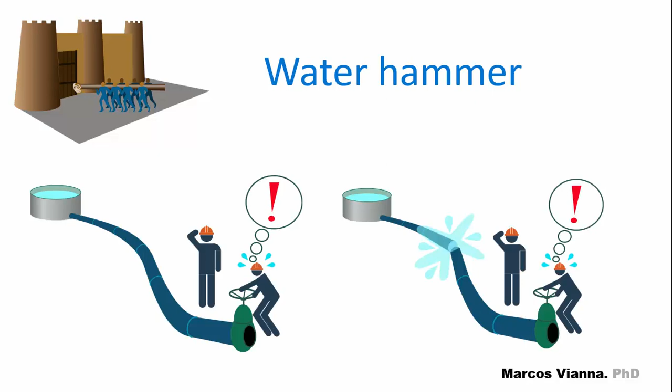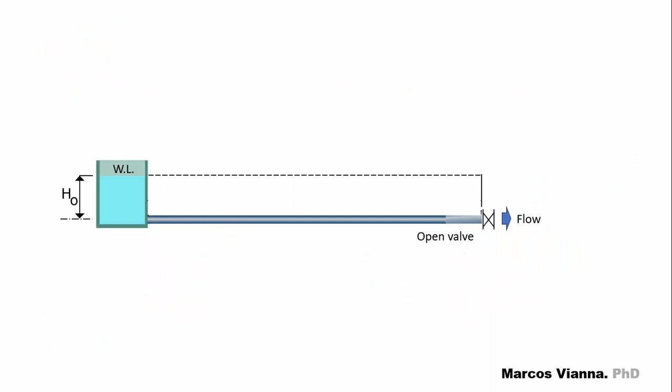In our previous video, we began studying the water hammer, a phenomenon which occurs in closed pipes during transient conditions. As we saw, it can happen during the closure of a valve, when the closure time is too small, and in pumped lines, when a power failure occurs. We saw that when water flows in an installation like this, if the valve is closed instantaneously, transient pressure or transient heads will occur.

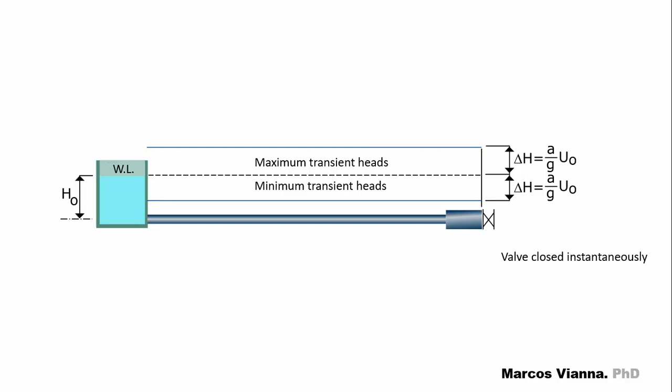Let's study this phenomenon step by step.

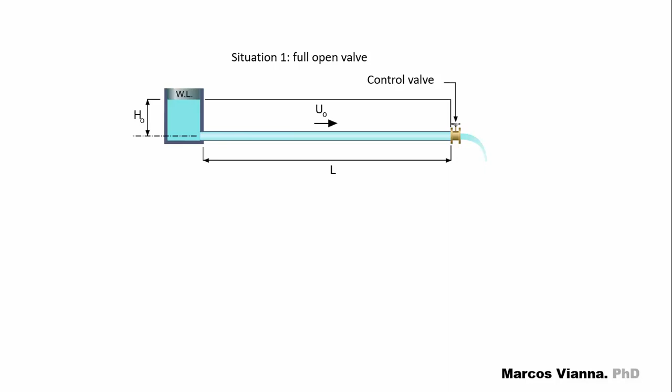Okay, this is the initial condition. Here we can see the water flowing in steady flow. But suddenly the valve is closed. Let's assume it's an instantaneous closure. Now we'll have a transient condition.

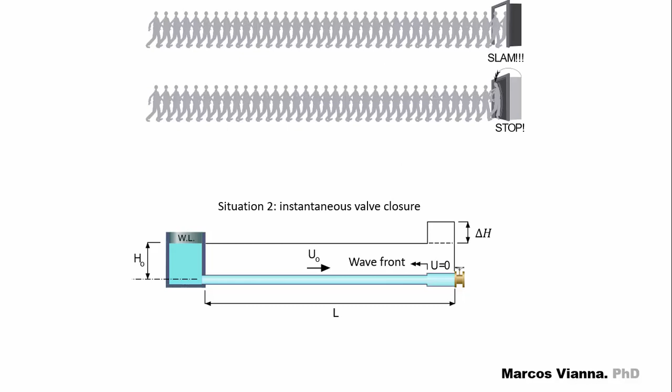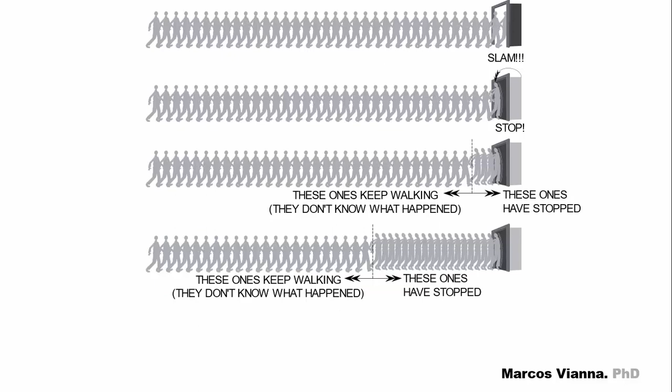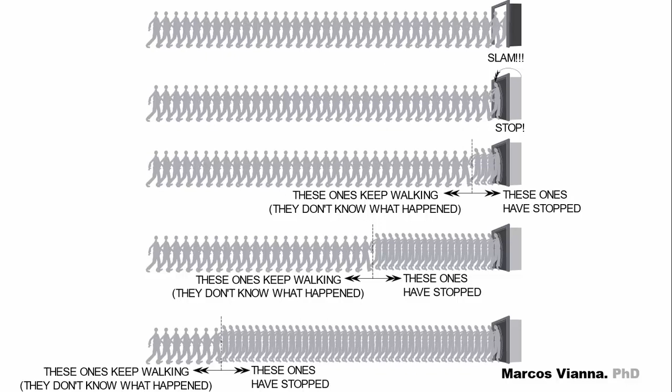It's a condition like this: a line of people is passing through a door and suddenly the door is closed. The first fellow bumps against the door, and the second, the third, and the other fellows will bump against whoever is in front of them, and so it keeps happening to the other fellows until the end of the line. Can you see a wave of bumps happening, which started at the door and is moving up until the end of the line? It's exactly what will happen to the water.

It compresses itself and stretches the pipe near the valve, and this phenomenon will travel from the valve to the reservoir as a wave. We know its intensity, given by the Joukowsky equation. We also know the velocity of the wavefront, or celerity. If you don't remember how to calculate those values, I'll leave their links in the description.

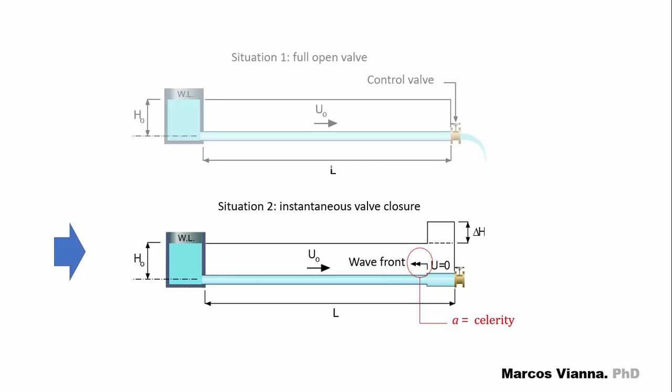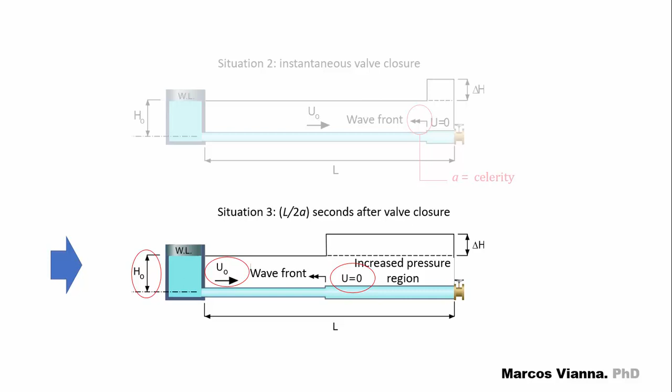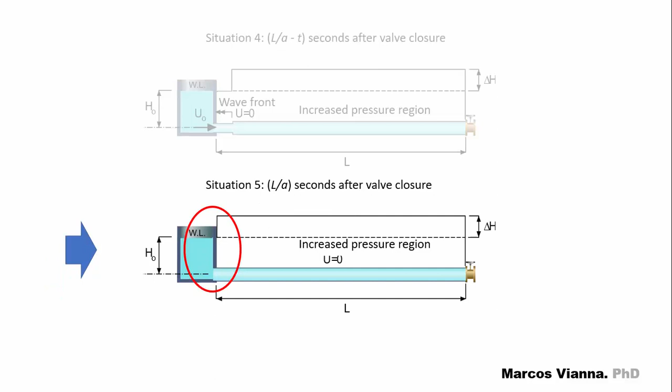From this situation, it will go to this new one. The wavefront moved a little. The water velocity behind it is 0, and it's still the same in front of it. And here it is again. Now the wavefront is getting close to the reservoir, and it hits the reservoir. Let's see what happens then.

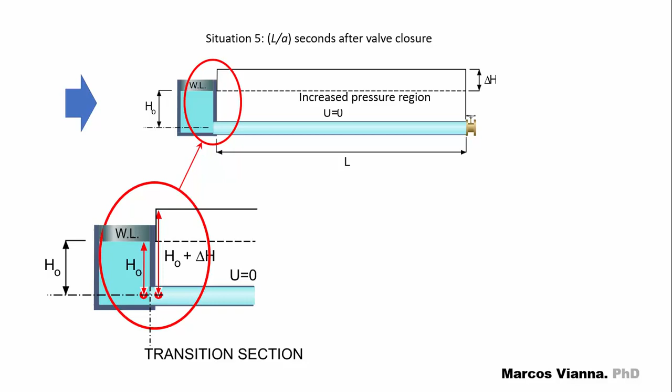We can observe there is an instability here. The water head inside the pipe is H0 plus delta H, while it's only H0 outside. This is an unstable condition, so the water will flow from the greater head region to the lower head region. As a consequence, its head will be H0 again. Notice that the water velocity will be the same as it was in steady flow, but in the opposite direction.

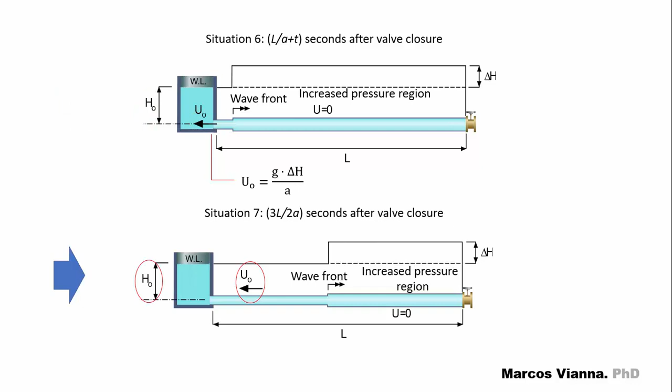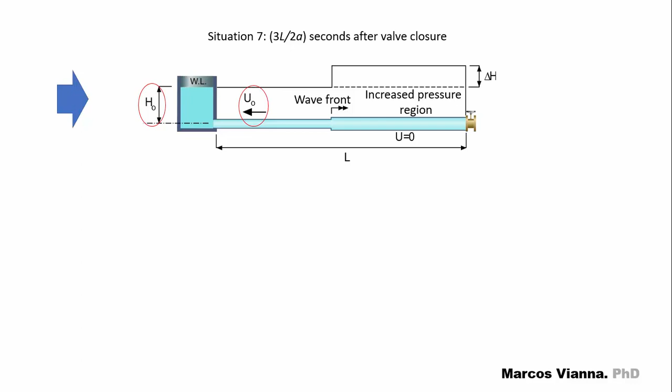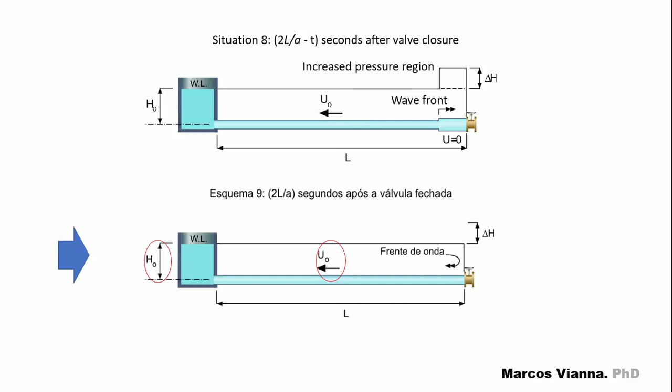And here we go again. It's another wave, restoring the head along the pipe from the reservoir to the valve. The water velocity behind it is U0, and it's still 0 in front of it. And so it keeps going. Now the wavefront is getting close to the valve, and it hits the valve. Let's see what happens then.

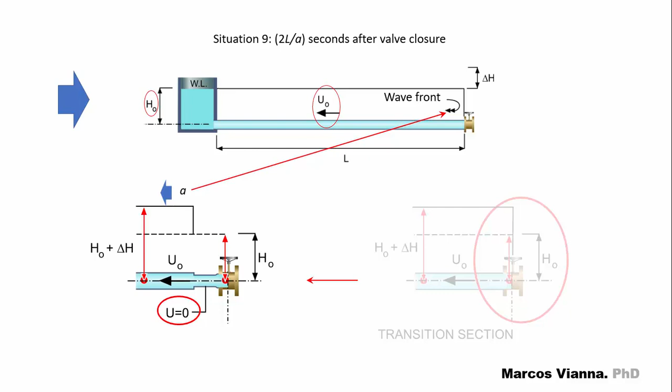We can observe there is an instability here. The water velocity inside the pipe is U0, while it's only 0 in the valve. Again, we have an unstable condition, but the water will try to keep flowing upstream. As a consequence, there will be a pressure drop near the valve. It happens as if you had a syringe and you pull its plunger, but its needle was clogged. The pressure drops, doesn't it?

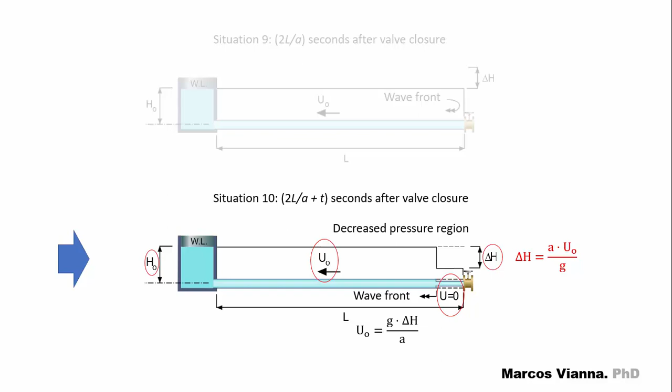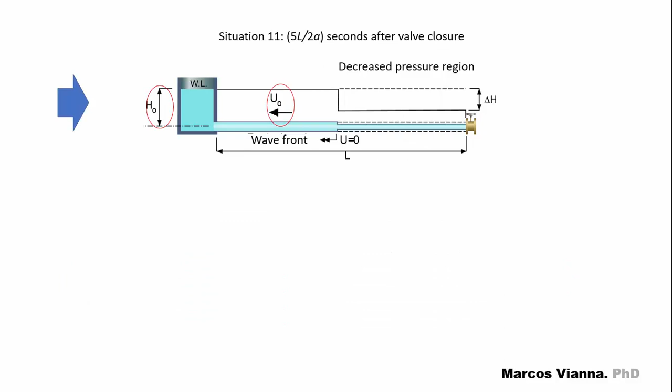So, coming back to our drawing, a new wavefront will form. Water velocity will be 0 and the pressure will be minus A U0 over G behind it, and nothing has changed at the front of it. And so it keeps moving from downstream to upstream, and now the wavefront is getting close to the reservoir, and it's almost there, and it hits the reservoir. And when it hits the reservoir, we know what's gonna happen.

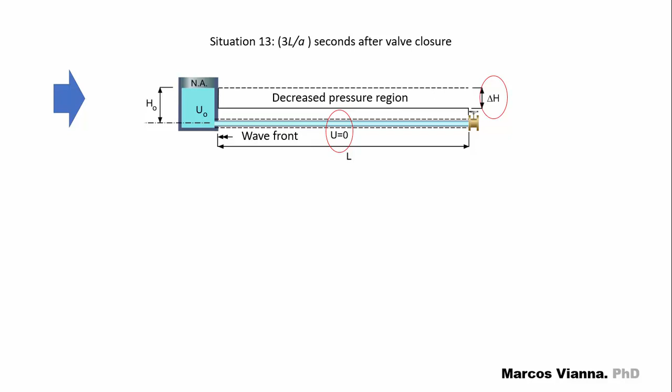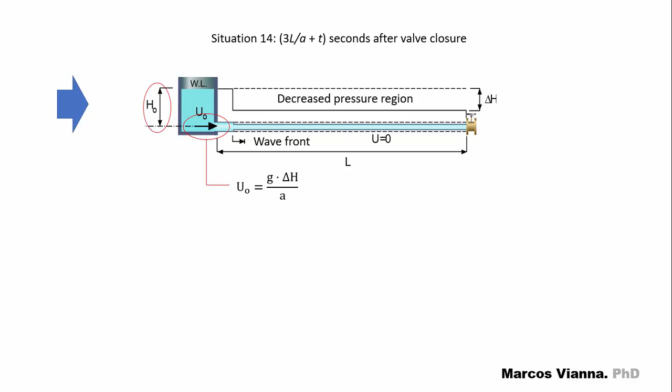The reservoir won't let the pressure remain lower inside the pipe, so it will release water inside the pipe. Notice that a new wavefront will happen, moving from the reservoir to the valve. The head will be H0 and the water velocity will be U0 behind it, which is just the same condition as in the steady state flow, while the head is still reduced and the water velocity is still zero in front of it.

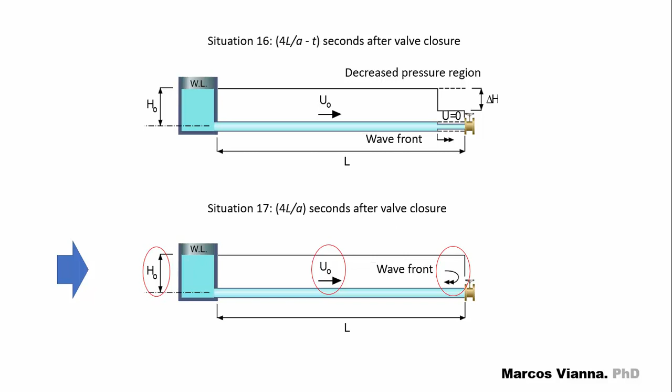And so the wavefront keeps moving from the reservoir to the valve, and it's getting close to the valve, and it hits the valve. Well, we've seen this before. In fact, we're back to square one. Everything is gonna happen again.

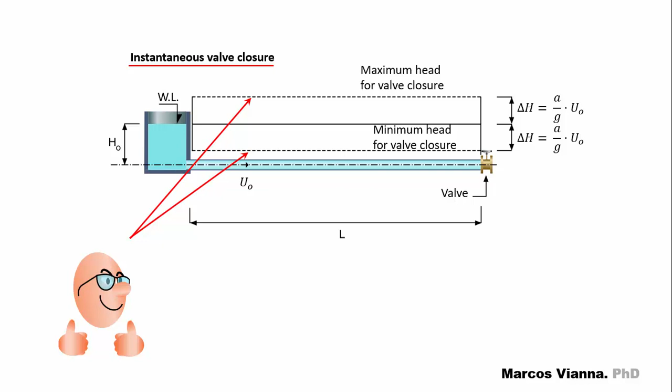Notice that if the closure is instantaneous, the same change will occur along the entire extension of the pipe, up and down. It won't happen this way if we close it slowly, but that's what we'll see in our next video. That's enough for today.